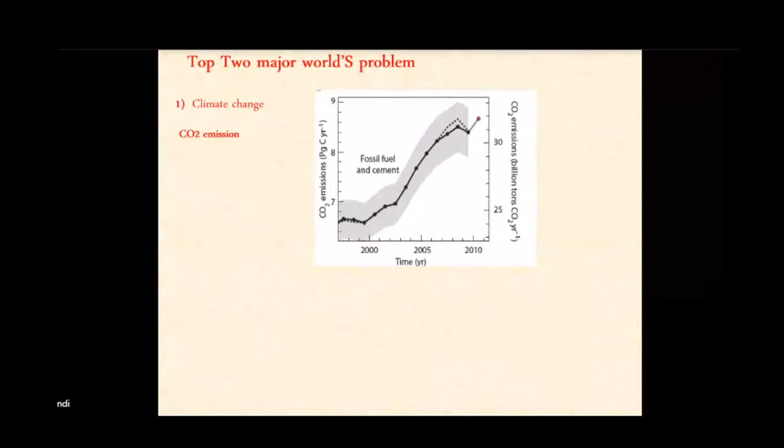Now, there are two top major problems in the world: climate change and CO2 emission. CO2 emission is the major concern. You can see the graph going very steep between 2000 to 2010. Now it has slightly steadied, but it is still increasing.

The effects will be global warming, and also sea level rising. These are the issues with CO2 emissions, because if CO2 emissions increase, it will cause ozone layer depletion. Those are the issues with CO2 emissions, and we will study any of that in detail.

Other than that is the major energy concern. Majority of the power plants work on coal-based power plants, and also coal is a finite source of energy. It is going to be over.

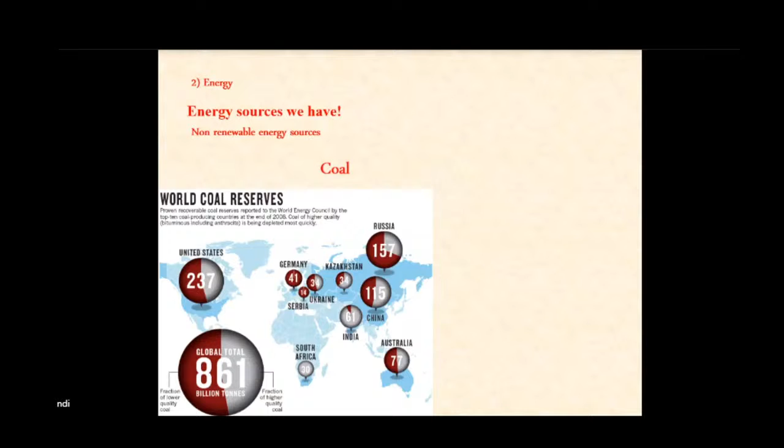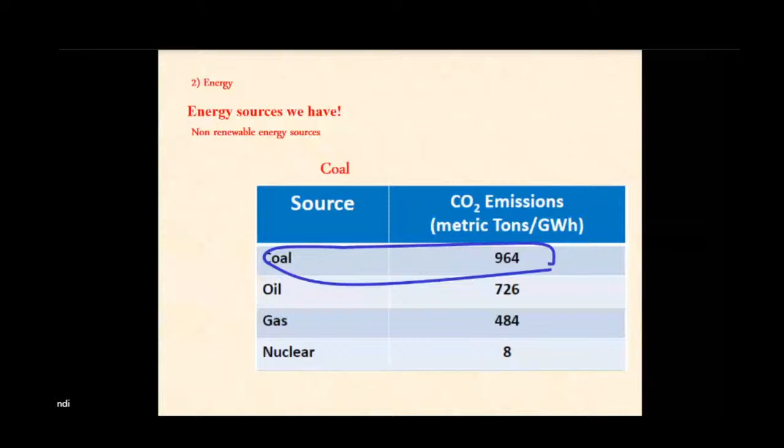Anyhow, we will see this in detail with Indian figures. A major concern is that by around 2035, it will go up to around 28 trillion kWh, which is the estimation of electricity generation. Still in that, you can see coal plays a major role.

But one more thing is that renewable energy is also taking over, because of the present government's initiation. We will discuss any of that in the next slides. Okay, this is regarding carbon emission.

The major difference is because their per capita energy consumption is very high. US is almost around 12,000 kWh per person per year, whereas in India it is hardly 1,020 kWh per person per year. That's why we have lower carbon emission per capita energy, much lower than the world average.

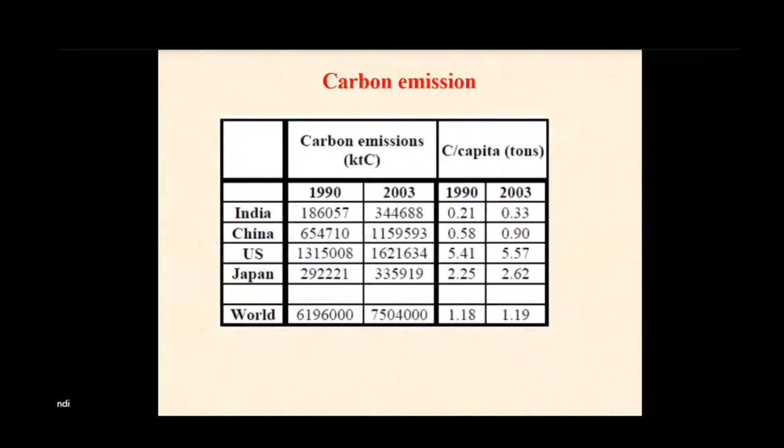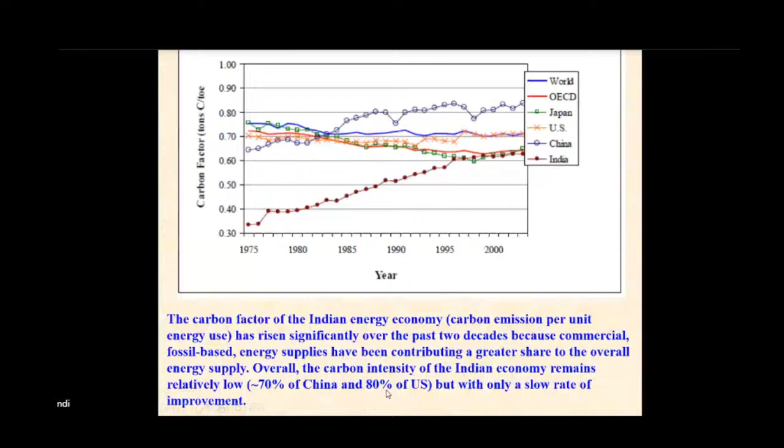This is the energy consumption, around 2010 figure, almost around 21,000 TWh per year. But up to now, we have crossed around 30,000 terawatt hours per year in energy generation, and CO2 emission accordingly is around 28,000 million tons. This is the world average.

Also, the major concern of CO2 emission is through power generation. Emission generation from coal is almost around 12,000 as of 2010.

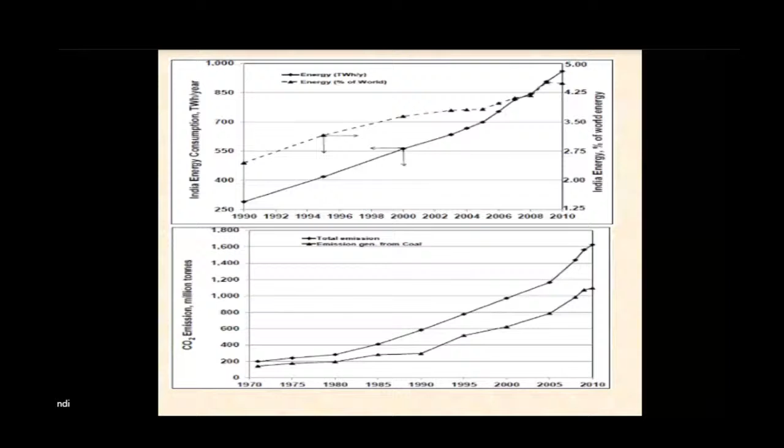Now, as far as peak demand is concerned, it is increasing, almost around 177 gigawatts. The deficit between supply and demand is coming down because of the government's initiation to set up many ultra-supercritical mega power plants.

Almost around 5 mega power projects have come, consisting of around 800 megawatts into 5, that is 4,000 megawatts in a single station. Like that, there's initiation by the government of India, and also a lot of private generating companies, and renewable energy systems.

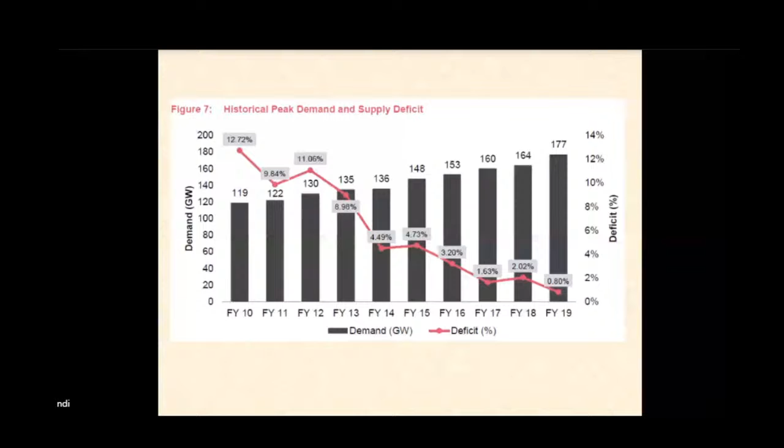Our peak demand and supply gap has reduced, almost around 0.8, which is not a major concern. Similarly, regarding energy supply, the deficit between demand and supply has come down to almost 0.6. Many power plants are being forced to take outage due to non-availability of demand. Now this is the scenario.

This is the installed capacity in India, as per August 31st. But as of now, it has increased to around 374 gigawatts. Another 2000 megawatts have been added in the last 3-4 months.

Now, why I am showing this is you can see coal and lignite based power plants are almost 55.3%, gas is 6.7%. Oil has come down because oil-based power plants have been converted into natural gas. One example is Tata Power, where a 500 megawatt oil-based power plant is fully converted into natural gas. Hydro is around 12.3%, and nuclear is slow phase, around 1.8%.

Renewable is the major one now, almost around 89 gigawatts of power is being generated. That's our Prime Minister's aim also, that by 2022 it will be around 175 gigawatts, our plan to set up renewable energy. After around 2030 or 35, our renewable energy is going to cross over thermal power plants. Anyhow, that planning report is there, we will discuss that.

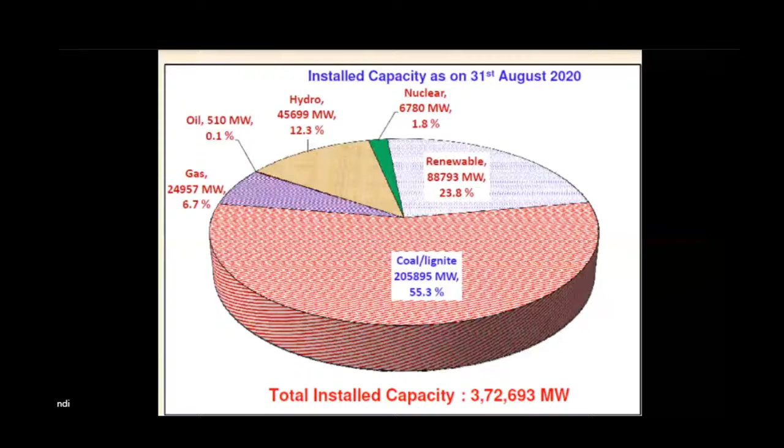Regarding generation addition capacity, you can see here thermal is still the major addition, but after 2014 onwards, a lot of renewable energy power plants have come. That's the change you can see at the bottom, the green has increased. This is mainly because of the government's initiative to go for renewable energy.

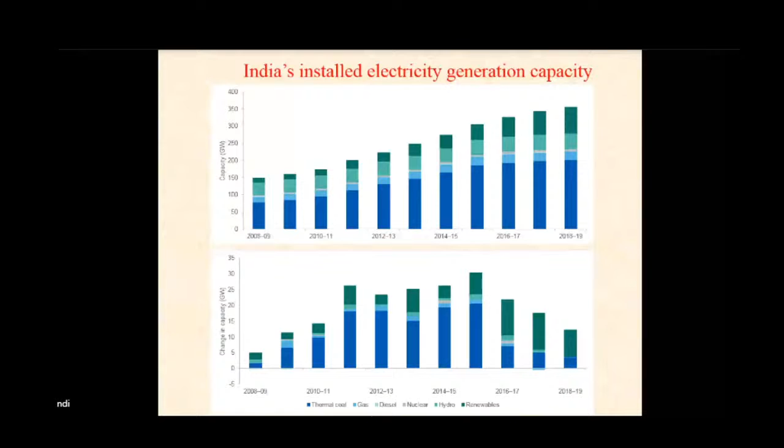Our Honorable Prime Minister and the France Prime Minister started the ISA, that is International Solar Alliance. In that, 121 countries have come, initiated by our Prime Minister. These two countries are going to train them and give technical support for setting up solar PV power plants. Under that, we are going to start an MTech program also in REVA University, to train engineers from overseas, from those 121 countries.

As of June 19, coal generation is around 201 gigawatts, renewable is 79, plus hydro. Now by 21-22, as our Prime Minister mentioned in one of the conferences, by 2022 our renewable energy will go up to 175 gigawatts. You can see by 26-27 itself, our plan is to go for renewable energy more than coal-based power plants, that is 275 gigawatts, to reduce emissions. This will help in controlling our environmental issues.

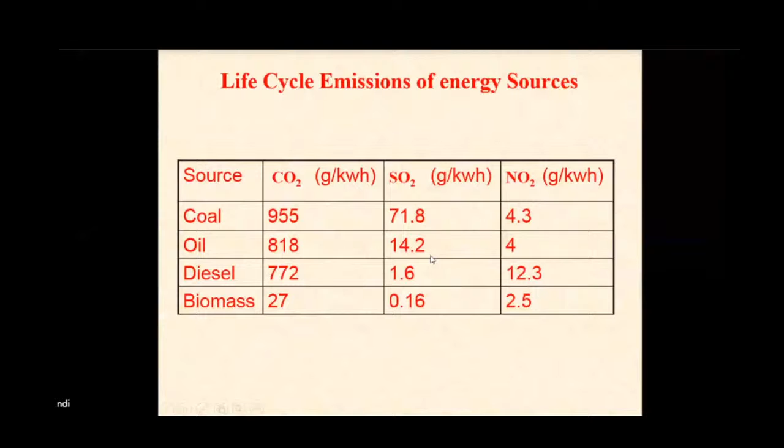The major concern here, emissions with respect to the India average, is 0.955 kg per kWh for CO2. SO2 is slightly on the higher side, but still less for Indian coal, and NO2 as well. This is based on data available from the internet and literature survey.

I have calculated the major concern about CO2, because a person releases CO2 at around 42 grams per hour, which comes to around 1 kg per day. To compensate that, trees absorb CO2 and release oxygen. Considering around 125 crore population, 18 trees per person are required to compensate for that CO2 emission. So to compensate our population, at least 23,400 million trees are required.

This is for the general ecological balance. Earlier, whatever CO2 human beings used to exhale was absorbed by trees, and they used to give out oxygen that was taken by human beings. That's how the ecological cycle was balanced.

Because of industrialization, technology upgradation, and the addition of transportation sectors, electric vehicles, and power plants, CO2 emissions have increased. Comparing with thermal power plants, the Indian average CO2 emission, considering all power stations from 60 megawatt up to 800 megawatt plants, is around 1.05 kg per kWh. Considering around 219 gigawatts of coal power, almost 2.3 lakh tons of CO2 is liberated into the atmosphere. To compensate that, almost 100 million trees are required. If sufficient trees are not available to extract that CO2, this CO2 will...

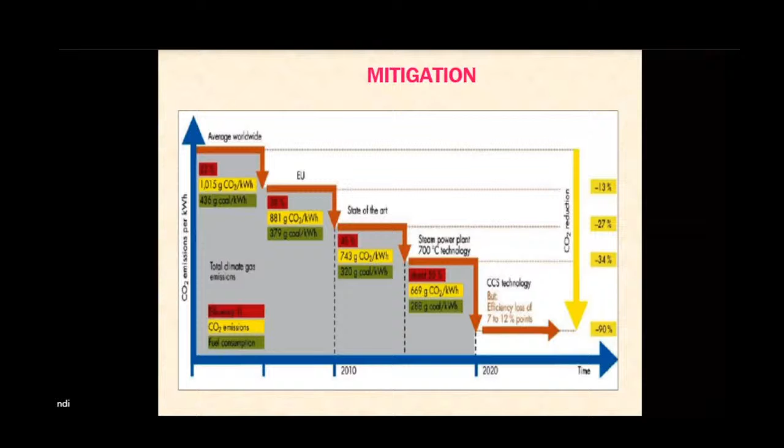One more slide, I think it is missing. Anyhow, as we go up the technologies, even comparing with older power plants like 120 megawatt and 140 megawatt, their specific CO2 generation is around 1.4. We have measured 1.4 tons per megawatt like that. Now this is regarding the power plant.

These are the components in the power plants. The major components will be the boiler. In that boiler, we have the water wall, then the economizer, then the superheater, then the reheater. In this boiler, the feed water comes from the HP heaters and goes to the economizer. After the economizer, it goes to the boiler drum, and from the boiler drum it comes to the water wall, sometimes called the evaporator. In that water wall, latent heat extraction from the combustion chamber takes place.

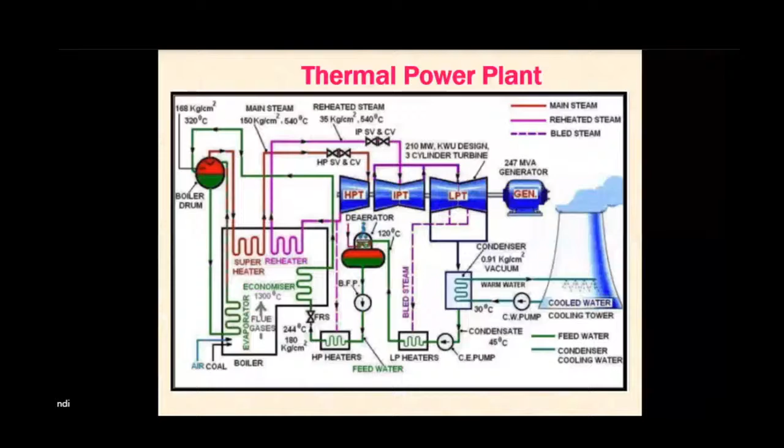Now, these are the major equipments: boilers, turbines, auxiliary power equipments. In that auxiliary power equipment, ST auxiliaries, that's what I was telling: boiler feed pump, condensate extraction pump, induced draft fan, forced draft fans, primary air fans, mills. And the outlying auxiliaries like CWP, that is circulating water pump, crushers, air compressors. Any of these things we will see later on.

This is the schematic of that. Already I have shown this one. Regarding this one, you can see this is the chamber, that is the furnace. These are the mill outlets. It comes here, and then coal is burnt here.

Then it comes to the air preheaters, APH. Then it comes to the ESPs. After that, the ID fan, then it goes to the chimney. This is regarding the flue gas circuit.

To combust that, air has to be supplied. In air, there are two types: primary air and secondary air. Both the airs will be heated in the air preheater. Secondary air is supplied by the forced draft fans, that will go to the chamber here, where a wind box will be there. It will provide the atomizing air, you can say that.

Then one more air, that is primary air. Primary air is supplied by the PA fans, that will go to the mills. In mills, hot air will mix with the coal, and the main aim of the primary air is to lift the coal from the mill to the burner. That's what, the coal air mixture temperature and flow is also very very important in combustion.

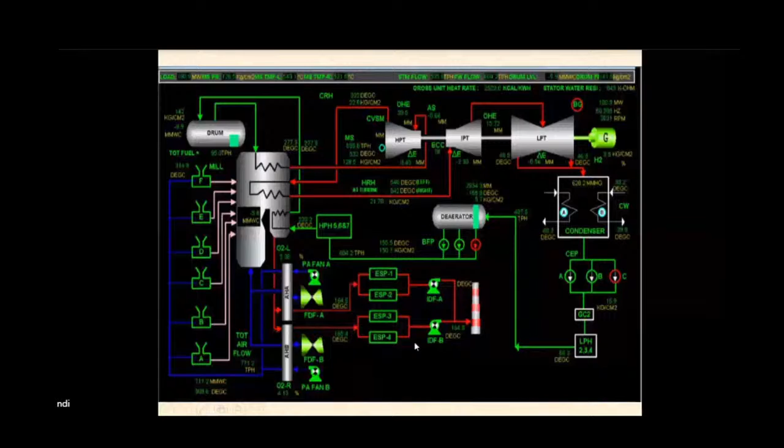This is regarding the condensate and feed water circuit. Already I have discussed this. You see, condenser, it comes to the deaerator, and then after deaerator, it comes to the boiler feed pump. Then it comes to the HP heaters. This is a reheat cycle. Then it comes to the regenerative feed heating cycle. Then it comes to the economizer and then drum.

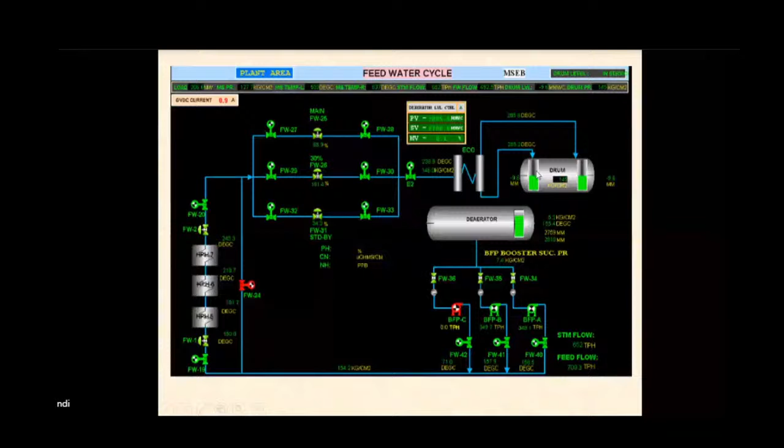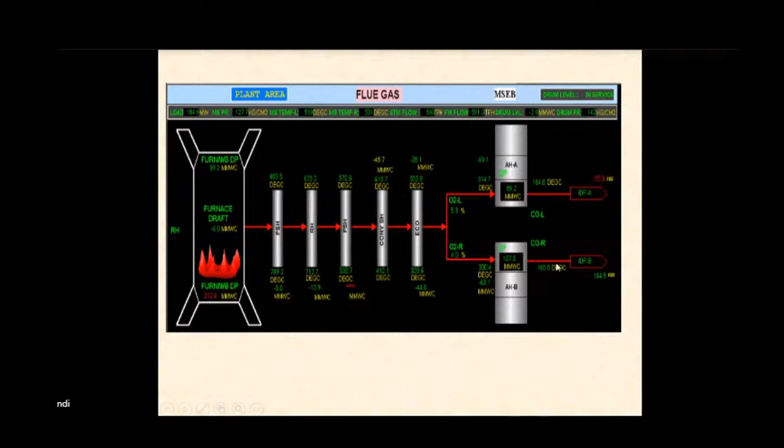We will see here how the flue gas will flow. Actually, this is the furnace - I was telling minus 6 is there, these are the live figures we have captured. Then this is the primary superheater, the reheater, and the platen superheaters. This is a final superheater, reheater, and platen superheaters. Then convective superheaters, economizer, then comes the air preheater, goes to the ESP, and after that it goes to the ID fan.

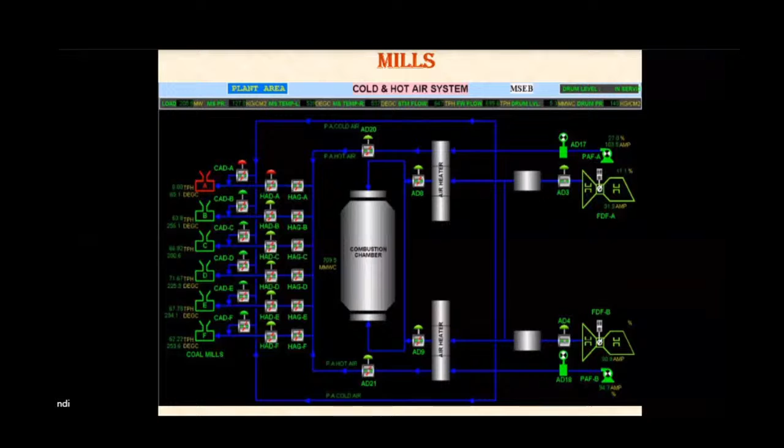These are regarding the same thing for any of this. I will skip that.

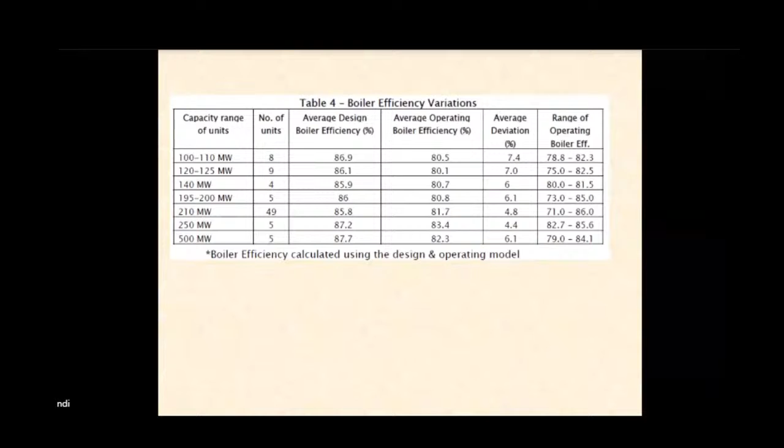These deviations are the major concern for increasing environmental pollution. These are again different cases - it also depends on the aging of the plant, because as the age increases, your efficiency comes down.

That's why in thermal power plants, they generally take two types of overhaul - one is the annual overhaul, and the other is the capital overhaul. Capital overhaul is taken once in 5 years, but annual overhaul is taken once a year. For the annual overhaul, they take about 20 to 28 days. Earlier they used to take more than a month, but nowadays they have optimized it - they identify the prone parts, rectify and then replace them.

But because of non-availability of schedule, many times these overhauls are taken during the rainy season - monsoon - because during monsoon all the hydropower plants will be at peak. But many times, even during that period, if sufficient power is not available, they were not given clearance for doing the overhaul. So they kept operating for an extended period. If it operates for an extended period, the performance becomes very poor, which causes poor performance and environmental issues.

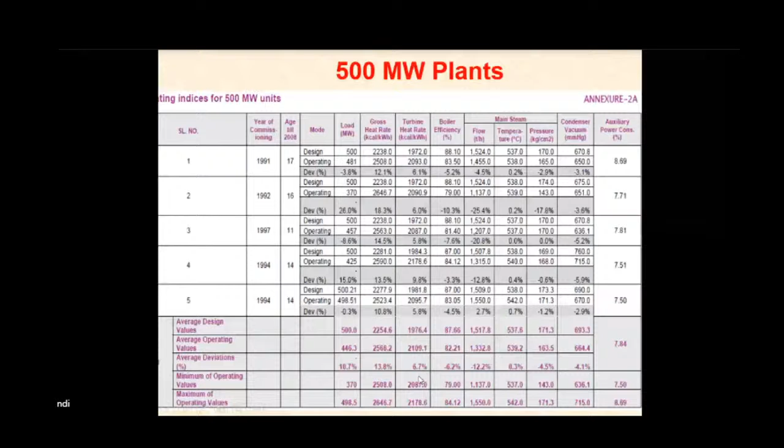The auxiliary power is more because this is a stabilization period, like a bathtub curve. Initially, in the first 1 or 2 years, all the parameters will be deviating more. Once it comes to stabilization, then it will steadily go down.

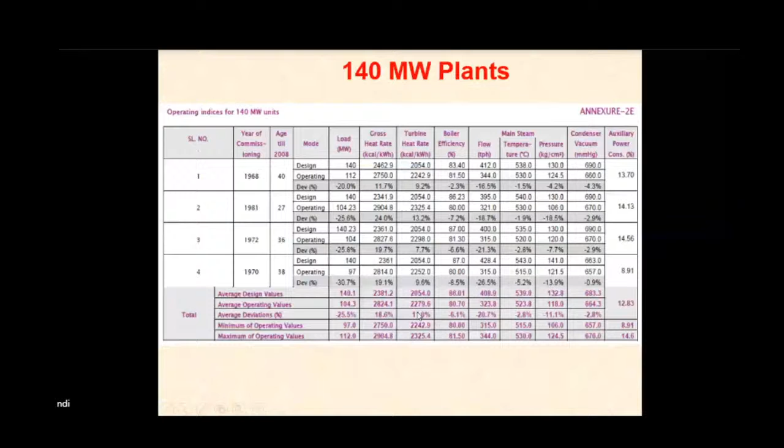This is for 140 megawatt. You can see here the average deviation rates are very high, in this case 18.6, because many of these power plants, even 100, 110 megawatt plants, also have more deviation. Many of the older power plants were of refractory type, tube and refractory type furnace. Nowadays they have gone for membrane type water walls, and wherever membrane type water walls are used, the performance is better than refractory and tube type furnace.

This is just I thought of giving this one. What are all the reasons for higher heat rate?

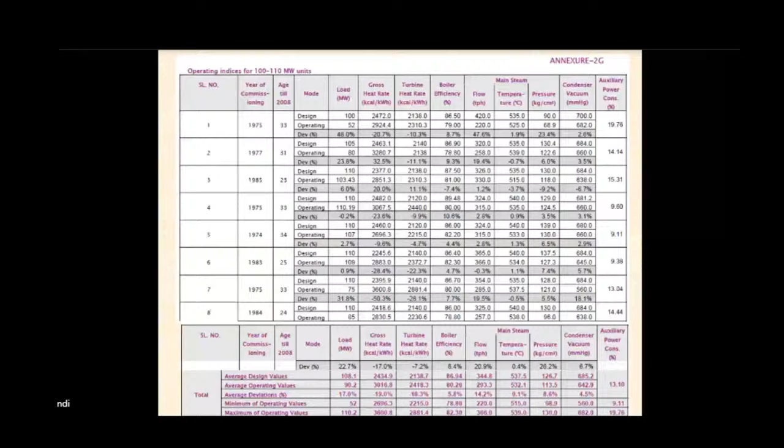The first one is low combustion efficiency leading to high carbon loss. That's the efficiency we have seen, the boiler efficiency was less. If it is less, to produce the same steam output you are burning more coal, which means you are adding more ash, more temperature in the flue gas and more CO2 emission. If your combustion efficiency is improved, then automatically you can reduce all these environmental issues.

Then higher forced outages, especially in these older units, because as the life goes, the water wall gets affected due to ash content. Higher ash content means the erosion rate is more, especially in boiler tubes, in superheaters or the economizer zone, where the ash erosion rate is higher for the boilers.

Also, many times what happens is our boilers are corner fired and a fireball has to be created in the center. We fire from all four corners to make the fireball form at the center. Many times, if there is a mismatch in the burner operation, problems occur.

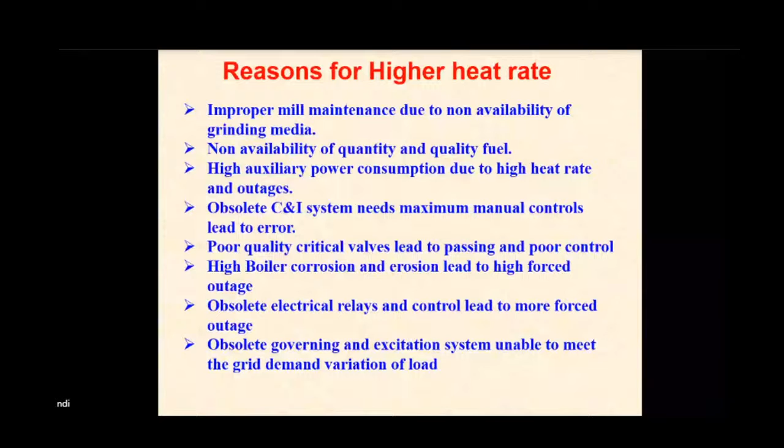We'll now discuss the major concern of environmental issues, mainly due to coal quality. If the coal quality is better, performance will be better and environmental issues will be less, because nowadays our Indian coal quality has gone down.

Our boilers are designed for a calorific value of around 4,000 kilocalories, but the presently available coal quality is around 2,600 to 3,000 kilocalories per kg. Because of that, there's a burden on the power plant.

We carried out a study at the Raichur thermal power plant during 98 or 2000. Because of the coal, they were unable to load the plant to 210 megawatts; they could only operate up to 180 megawatts, due to high ash content coal and lower calorific value.

That's what led them to import coal. In other countries, better coal is available, such as Indonesian coal, with different calorific values, and South African coal. Then there's Australian coal, and Chinese coal, which is also better.

The ash content in these is very low, whereas in Indian coal, we've measured ash content up to 55 to 60%. As ash content increases, the burden on the ESP increases, and the burden on the ID fan increases, automatically reducing performance and adding to environmental issues.

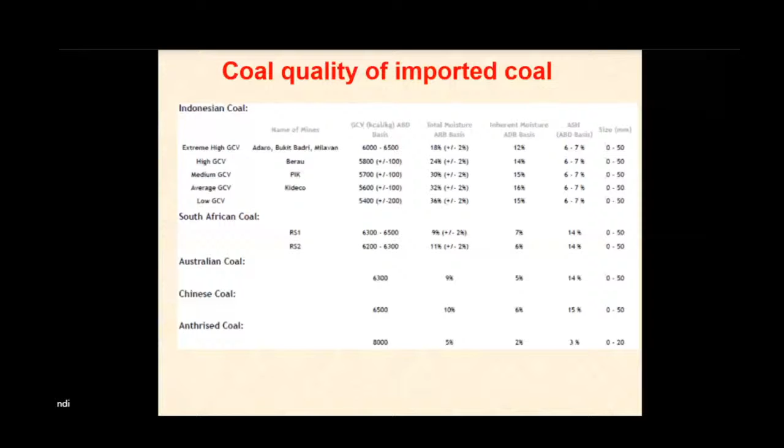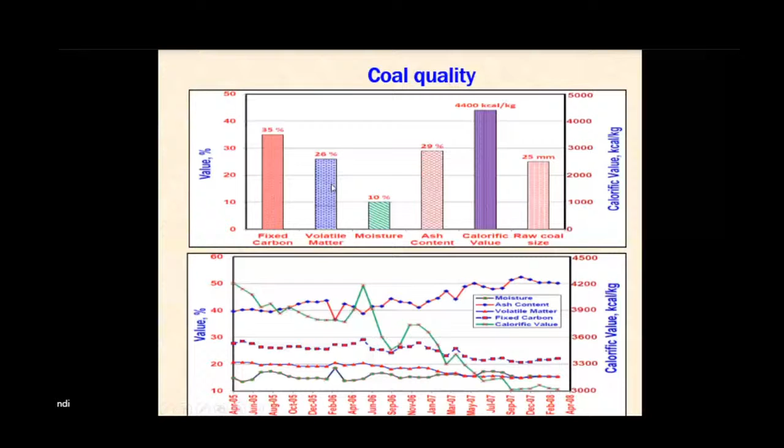These are generally the designed values. In one power plant we studied up to 2008, you can see over the period of time ash content has increased, while calorific value, shown by the green line, has come down. These are the designed values shown here.

Again, as I mentioned, as the calorific value of coal increases, heat rate comes down, meaning performance improves. Over the period of time, heat rate has increased as calorific value has come down.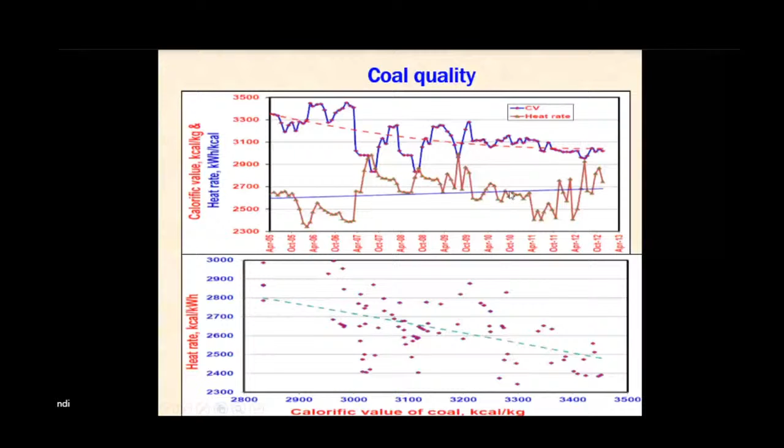If your calorific value of the coal increases, your specific fuel consumption - that is, to generate 1 kWh your fuel requirement will be less. And at the same time, your auxiliary power also comes down if your calorific value of the coal is better.

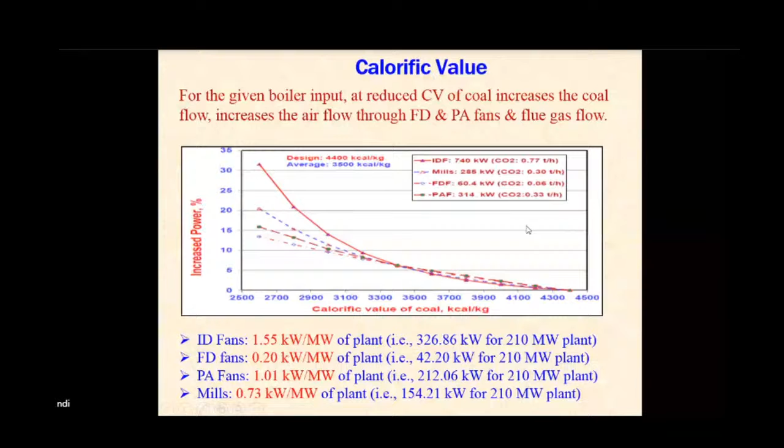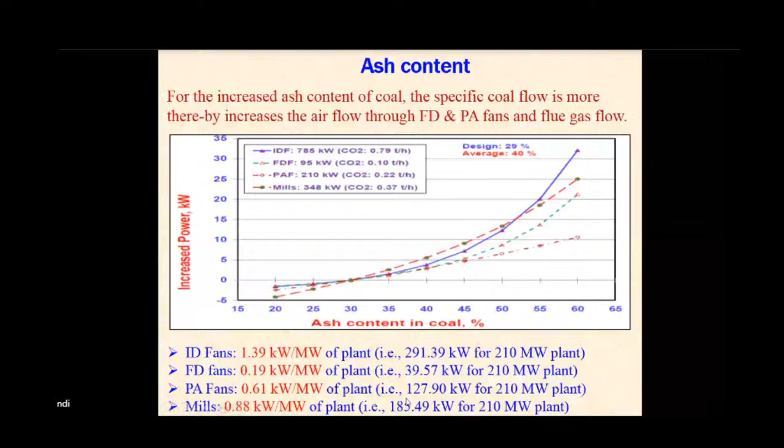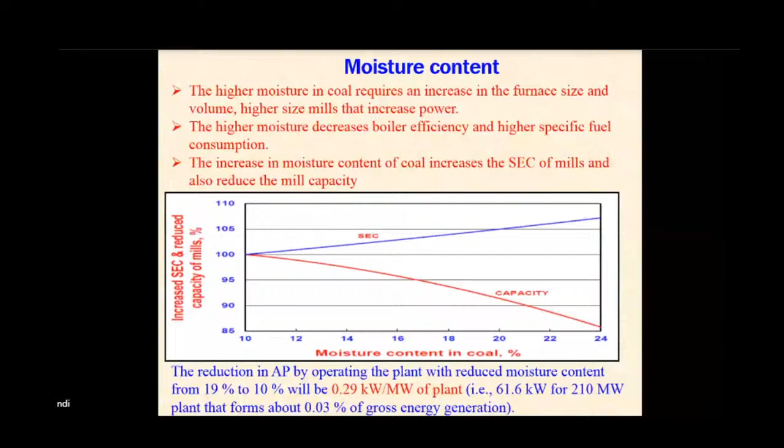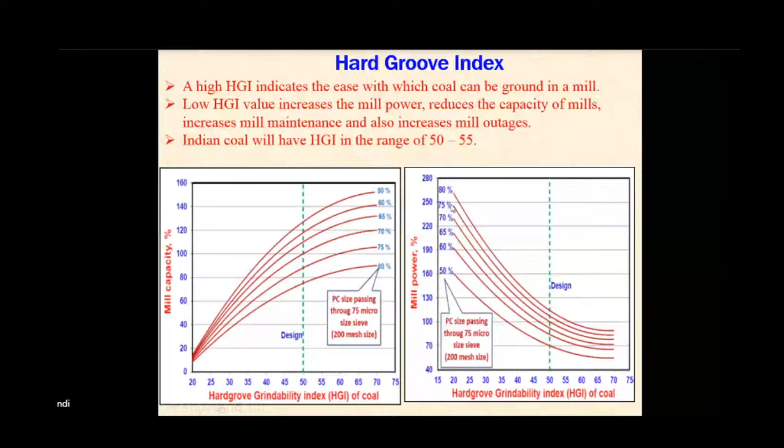Then Hardgrove index - this is also a very important parameter. Generally our boilers are designed with HGI 50 to 55, that's what Indian coal Hardgrove index is. But some imported coal has a lower Hardgrove index, and if the Hardgrove index is less, your grinding power requirement is high - the mill power requirement will be high as the Hardgrove index gets lower.

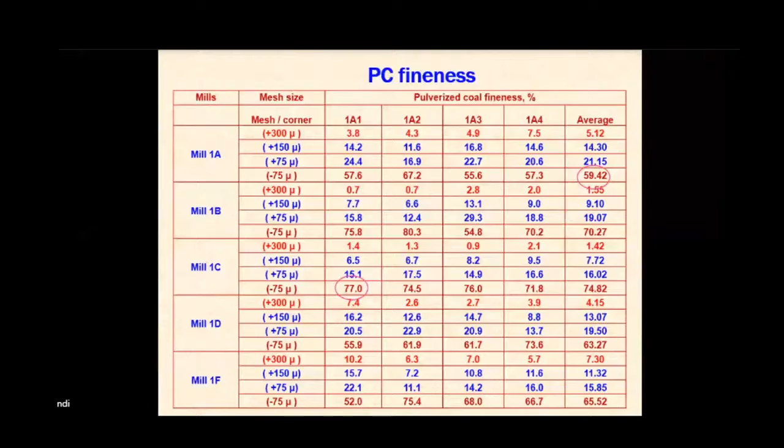Regarding particle size, as the percentage passing below 75 microns increases, your mill power will increase.

Another major problem with these mills is the raw coal. Generally, coal comes from the wagon to the coal handling plant, wagon tippling tips the coal, then it goes through the conveyor to the primary crushers. Some power plants have two stages of crushing, but modernized plants go for a single stage. Primary crushers and secondary crushers are used, and after the secondary crusher it comes to the mill. As per design, the coal size should be around 125 mm at the inlet.

The 125 mm coal has to go to the coal inlet, but the coal output should be less than 25 mm size. The construction of crushers differs - primary crushers generally use hammer type mills. In hammer mills, it hits the bigger coal and specific energy consumption is less, but the sizing performance is less. In the primary crusher, coal is reduced to around 125 to 50 or maybe 75 mm, then it goes to the secondary crusher, which reduces coal size to below 25 mm.

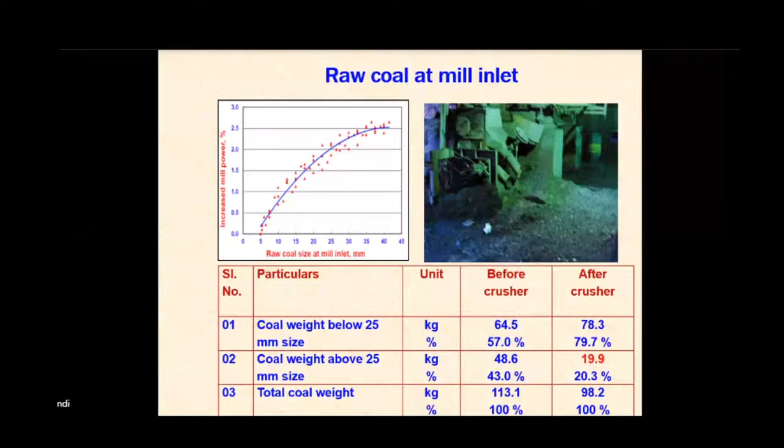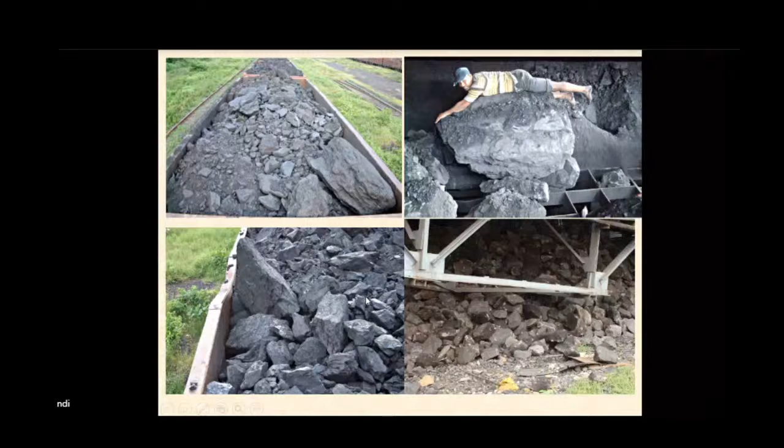Again, I was telling that this is washed coal. What washeries do is wash the coal to reduce the ash content. You can see here the ash content of raw coal versus washed coal - the ash content has reduced. Thereby the performance of the plant increases because your ash reduces, and at the same time your CV increases.

You can see here the range we have actually got from the field, okay, and this is also washed coal. By washing the coal, you can reduce almost 20 to 25% of the coal quantity, and thereby reduce the transportation cost also.

Generally washeries keep the coal near the collieries only, because from there they can reduce the transportation cost by using that washer. Some of the performance benefits I will show - plant efficiency increases.

We have carried out some study here. By using washed coal, you can see the ash content has reduced from 52% to 31%. The CV has increased from 3,000 to 3,550. The auxiliary power, especially of fans and mills, has come down - about 0.43% of the total auxiliary power is reduced, and CO2 emission is reduced by about 0.94 by using the beneficiated, that is washed, coal.

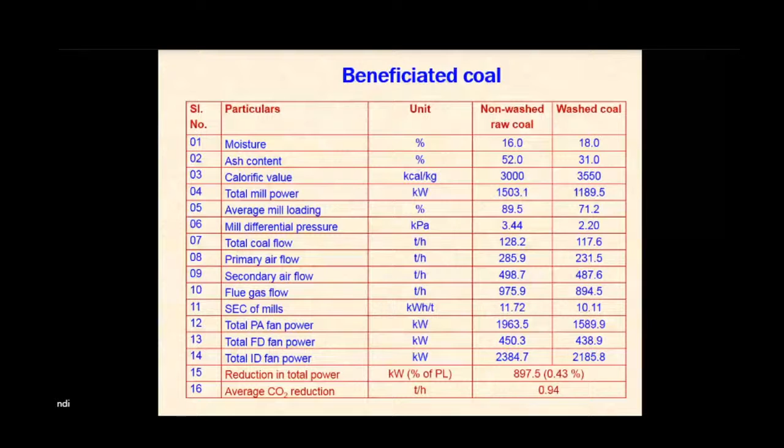This is another case, Satpura Thermal Power Station, that is NTPC. They have presented this in one of their papers. PLF increased from 73% to 96% because if the coal quality improves, your plant loading capacity increases. Coal consumption reduced because your specific coal consumption comes down, as you are removing the ash.

Without washing, if you burn the coal, you unnecessarily add all the ash into the boiler, because ash causes erosion. By washing, you can reduce the erosion rate, and that's what reduces your auxiliary power. Downtime, especially boiler tube failures and such, will reduce drastically by using washed coal. With no fuel support, boiler efficiency improves by about 3%, and mill power consumption has reduced - they have presented this.

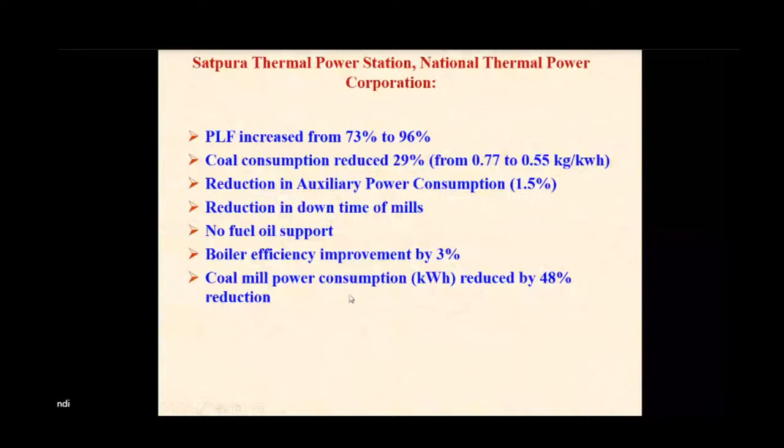You can see here, this Dadri power plant, again an NTPC plant, has 4 into 210 megawatt units - that is megawatt, not milliwatt.

There is also savings in damages during unloading. When the coal rake comes, they give some time to unload it. If you don't unload and hand over the wagons to the railways within that particular time, they will charge a demurrage fee. Because the quantity has come down, they are able to save that demurrage charge, and it's also easier because in washed coal, they have a crusher too. With that crusher, the size of the coal has come down drastically at the collieries itself, instead of getting boulders which take time to clear. That time also you can reduce.

That way you can reduce the demurrage charges and increase operating hours of the plant, because your mill outages come down and the erosion rate inside the furnace comes down. This means increase in PLF, increase in utilization factor, reduction in breakdown period by 60%, increase in overall efficiency, increase in generation, reduction in support fuel oil, specific fuel consumption comes down, increase in total units sent out, reduction in CO2 emission, and reduced transportation.

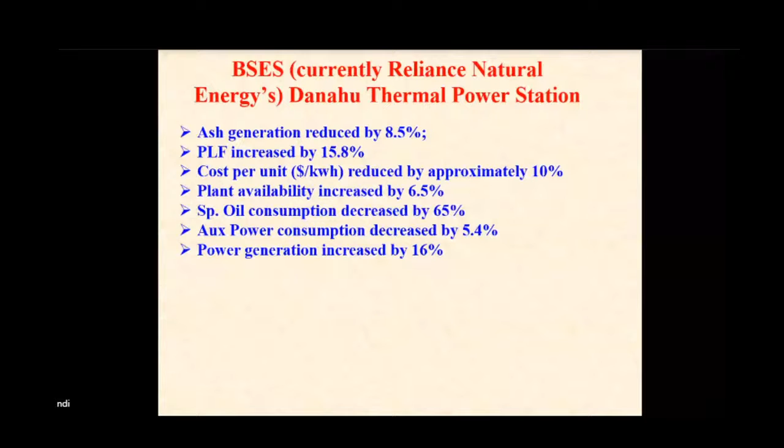This is regarding the beneficiated coal, that is the washed coal. Now, coal blending, as I was telling, imported coal, the calorific value is almost more than 5,000 or 6,000. Even sometimes earlier, initially we have seen Australian coal up to even 8,000 kilocalorie per kg.

But the problem with this imported coal is that because of the higher calorific value, we cannot burn it directly in our furnace. Why? Because our boilers are designed at 4,000 kilocalorie per kg initially, then later on some boilers were designed with 3,700 kilocalories. Only for that particular coal, if you burn it, it can perform.

If you go for higher calorific value coal, like 6,000 or 5,500 or maybe 8,000 kilocalorie, what happens? Your burning will increase, your latent heat extraction has to be increased, and the size of the water wall has to be increased.

Because your latent heat extraction comes down, your superheat, that is the convection superheaters, there the heat extraction has to increase. What happens? Your superheater temperature shoots up because the heat content in the furnace cannot be taken away by your water wall due to the constraint. If you burn high calorific value coal, that's what happens - it goes to the superheater zone or maybe reheater zone.

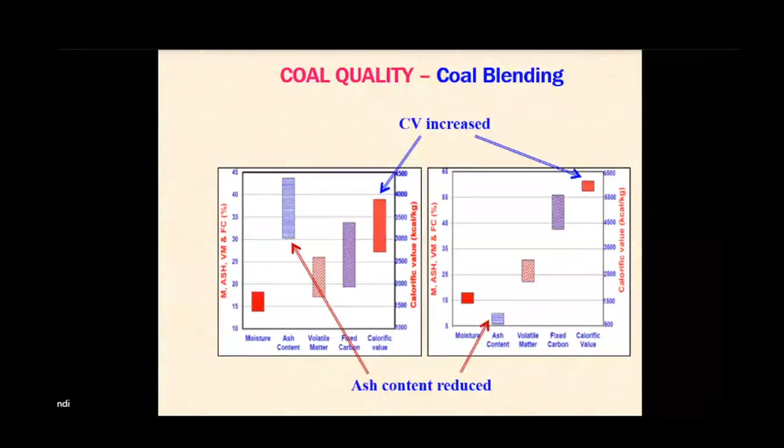That's what they do instead: tier blending. Tier blending in the sense, there are 6 tiers in a corner-fired boiler, that is A, B, C, D, E, F. In that, one mill goes for imported coal, and the remaining 4 mills go for Indian coal. Thereby they can increase the efficiency.

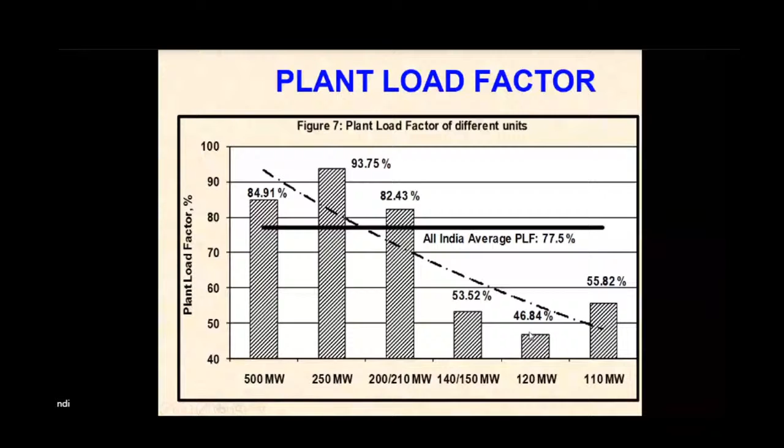Then again, plant load factor is a major concern. Your performance depends on the plant load factor. Different megawatt plants have load factors varying from 93 to, even for this 120 megawatt plant, their power plant load factor is low. That caused the poor performance.

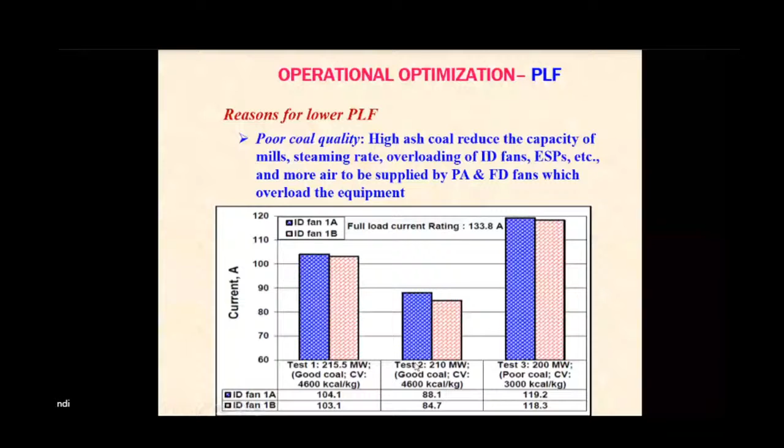Again, we have carried out some study in the Danahu power plant, that is Reliance, using different coal. You can see here poor coal versus good coal with a CV of 4,600. There they were using Indonesian coal and Indian coal also. With good coal, you can see here the ID fan current is less, but whereas with poor coal, the ID fan current has gone up much more.

Here you can see here the plant capacity also we have seen. The margin is very, very less in case of the poor coal. Your efficiency will be less, and your auxiliary power consumption will be very high in case of poor coal.

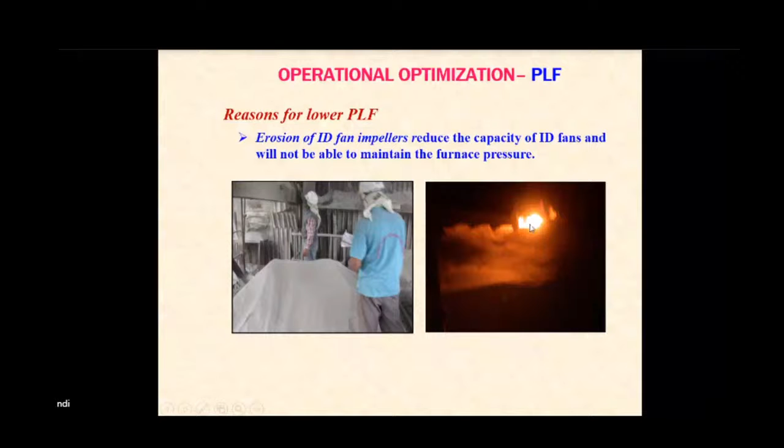This you can see here, some of the ID fan impeller erosions, and this is one of the... air ingress. Air ingress also causes the loading of the ID fans. You see one of the power plants, you can see this ash puffing. Actually this furnace is working with positive pressure. You can see here manholes, these are all causes for the air ingress.

You can see here, just I will skip some of the things.

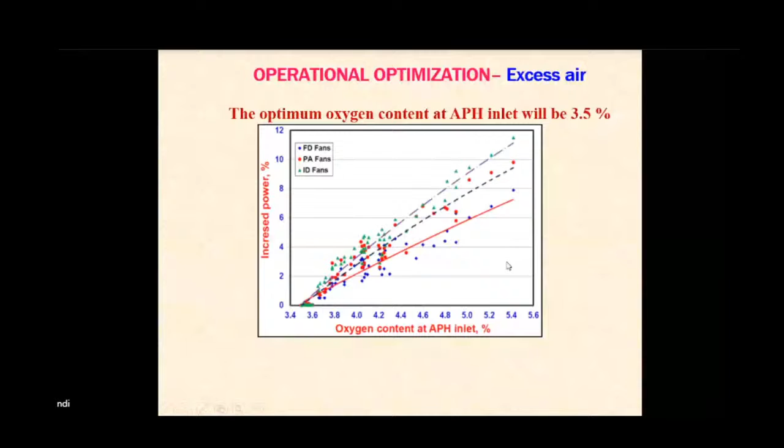Here you can see these are the openings, air leakages in the ducts. If there is air leakage in the duct, what happens? The additional air will not take any part in the combustion, so unnecessarily your excess air will increase. If the excess air increases, your dry flue gas losses will increase, and at the same time your exit flue gas temperature increases.

That causes environmental issues, and your ID fan loading will increase. These are the manholes they have provided, but they have not closed it, they have kept it open. Also, insulation on the boiler drum, you see that is not there, and you see these are the leakages. You can see a lot of ash and ash puffing, we will call it, and this is the blow down.

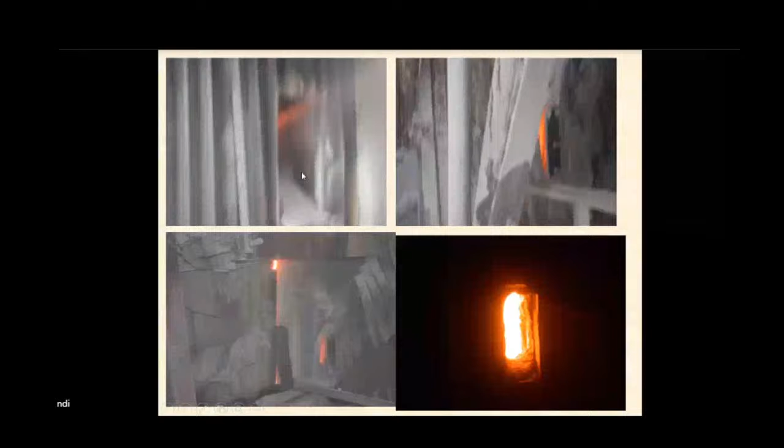Again, you see this is a positive pressure. You see this, it's coming out, the flame is coming out. It is very dangerous to go around this one. That's what the temperature surrounding the boiler will be more because of this puffing.

And that's what I was telling, you see the furnace pressure at the furnace will be on the negative side. This all will be negative. Only at the ID fan outlet it will be more.

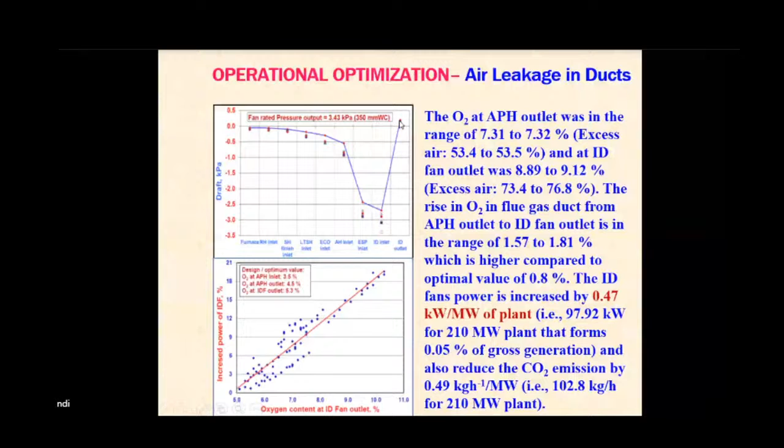Air leakage, and flue gas pressure drop in the APH, that also causes this - more auxiliary power for the ID fans. That also reduces the capacity. That's what you can see here.

There are so many blockages. Here also you can see cementing has happened, so there is no passing of the flue gas. That's what they have to do - once overall, they have to clean up or replace the baskets.

This is one of this one - again for proper combustion, your excess air should be maintained around 17 to 20%. Why excess air? Because our main aim is to convert total carbon into carbon dioxide. If you give only theoretical air, you may not be able to convert full carbon into carbon dioxide.

What happens if you don't provide that properly? Then your unburned, that is CO formation, will be more, and CO at your boiler outlet will increase. If the CO is more, it is hazardous for human beings as per CPCB norms.

CPCB norms say it should be less than 100 ppm, and at the same time the ash particle - that is the particulate matter at the exit of the chimney - should be around 150, but now they have revised it to 100 microgram per meter cube. At the atmosphere, at any point, if you measure the particulate matter 10, the value should be less than 100 microgram per meter cube.

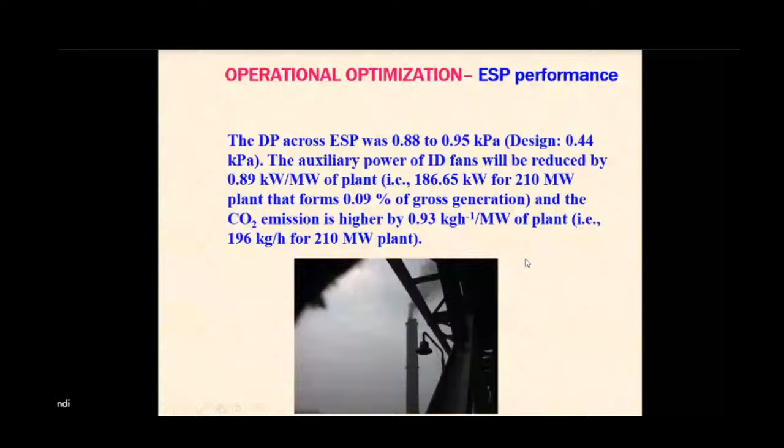This is one of the power plants we have seen. You see the dust concentration at ESP is actually around 1060 to 9319 milligram per meter cube is measured. As per the design value, it should be around 100 milligram per Nm cube, but during the test also you can see here 1600.

What happened? This is mainly because of the non-operation of the ESPs. ESPs are designed for 60 kV DC voltage, and it was varying between 17 to 40 because of some problems, and current also was varying between 40 to 200. Means it is not able to load, so the collection of the plates is very poor.

That's what makes your dust concentration at the ID inlet very high. Because of this high dust concentration at the ID fan, every 6 months they have to change the ID fan impeller. Otherwise, ID will not create the sufficient negative pressure, because the main aim of the ID fan is to create the negative pressure in the furnace.

If it is not able to create that negative pressure, generally in the power plant, if the pressure goes to around 10 mm of water column, it will give an alarm, and if it goes to 15 mm of water column, it will shut down this furnace. That is the condition. To maintain that, sufficient suction has to be created by your ID.

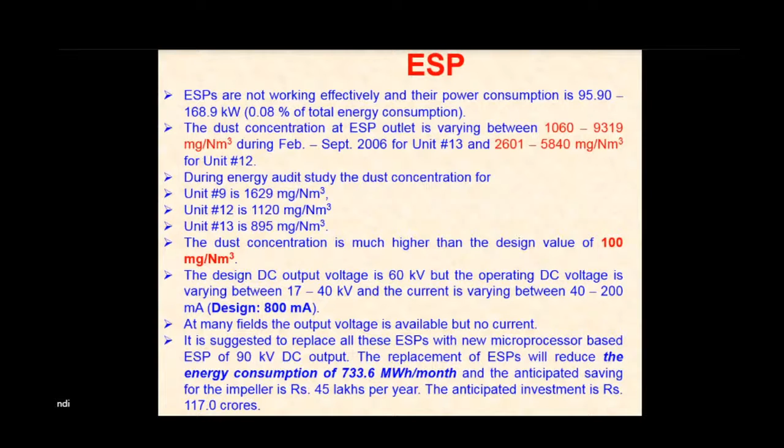This is another one, one of the power plants we have seen in MSEB, that is Parli, or maybe some other one. There we have seen they were using ammonia injection into the flue gas. By injecting the ammonia in the flue gas, the resistivity of your dust, that is the ash, will come down. If the resistivity is less, your collection efficiency of your ESP increases.

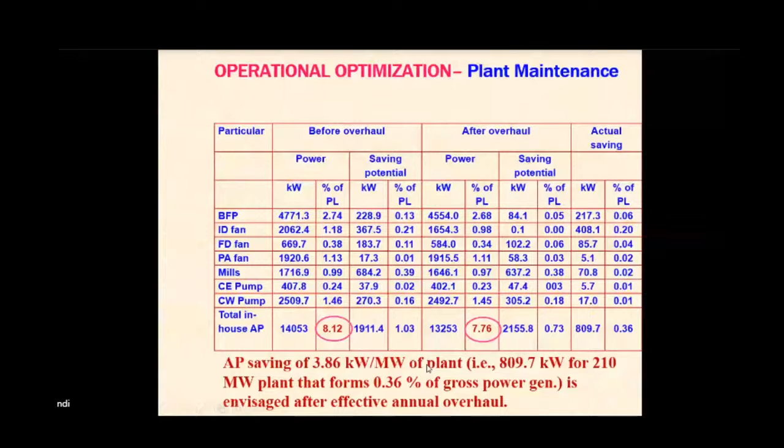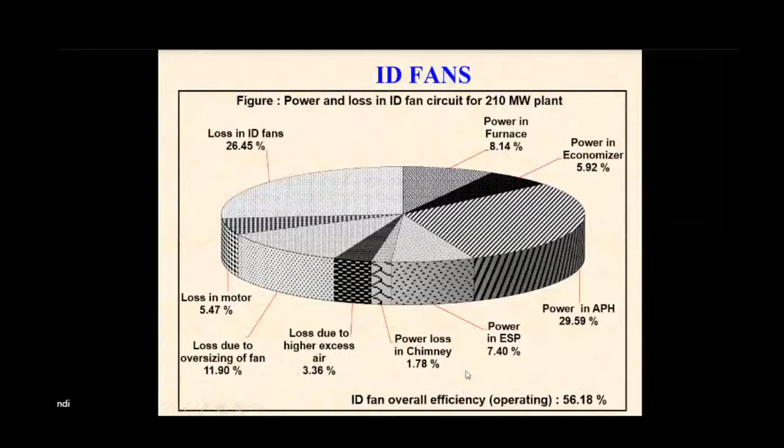Boiler efficiency, yeah, this. Some of the ID fan performance what we have measured, 56.18%. In that, what are all the components in that? That's what I was telling.

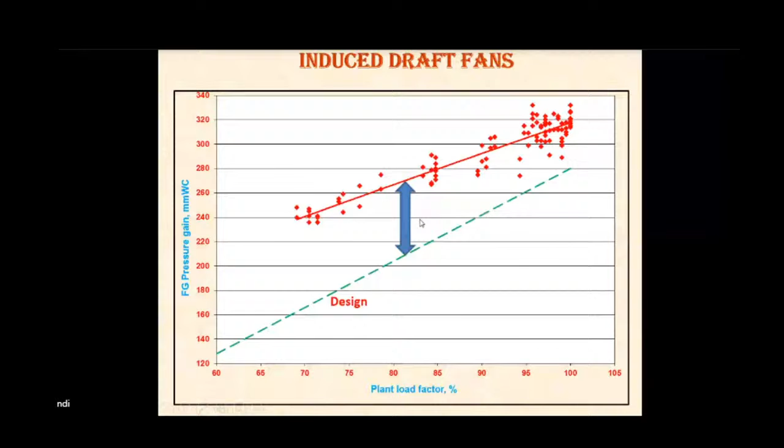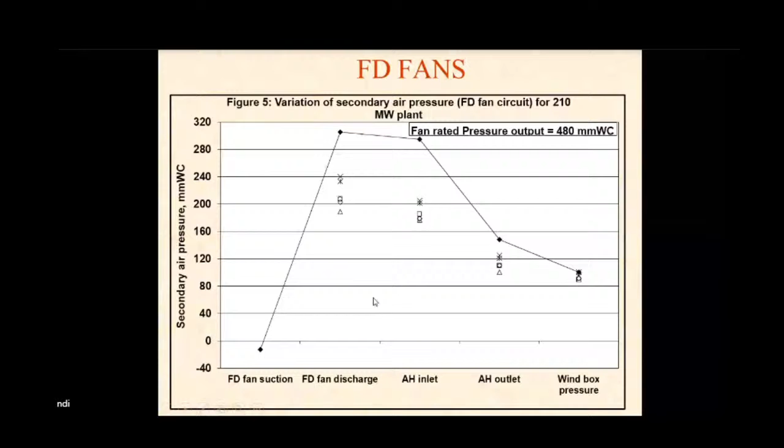And then again this is the power consumption. This is the FD fan, that is the secondary air fans. In that again the pressure, this deviation. This is the power, auxiliary power.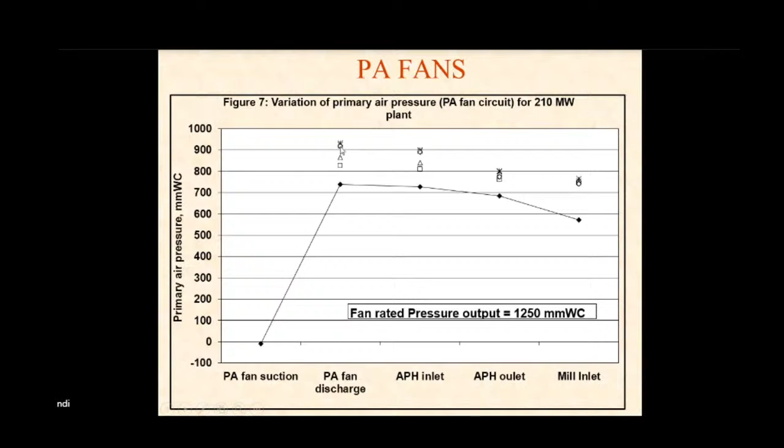These are the PA fans. PA fans generally design pressure will be around 1200, 1250, but operating will be on the lower side, mainly because of the leakages and other things.

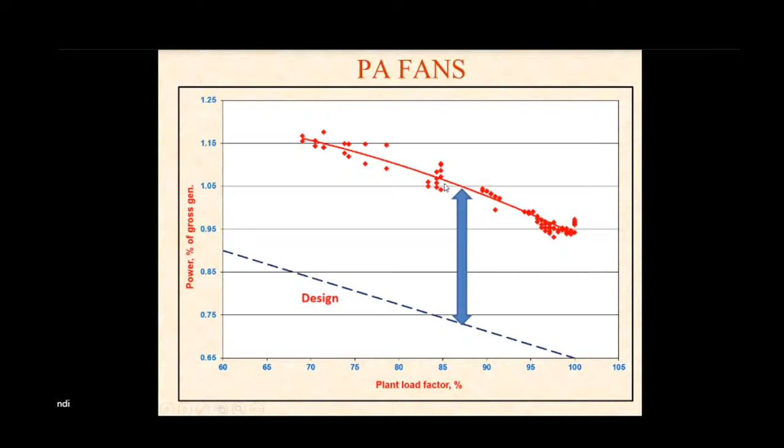This is again the power consumption. You can see this is the gap between the design value and the operating value. These all add on to your environmental issues. And again, condenser vacuum.

I was telling about the condenser vacuum. That is because of these condenser tubes. You can see a lot of tubes are blocked. Because of that blocking of the tubes, so many tubes are blocked, that caused your condenser vacuum to be less. If the condenser vacuum is less, your steam extraction will come down, and your plant efficiency comes down.

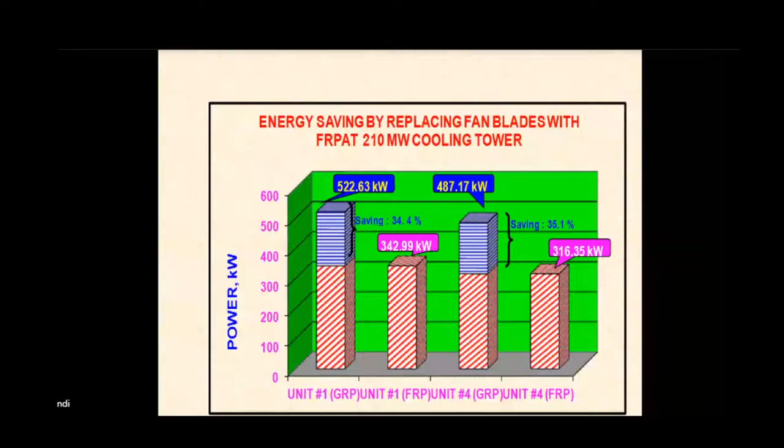And then again, cooling tower. We have carried out some study in an NTPC power plant, replacing the FRP fan, GRP fan they were using, by replacing with the FRP fan. With this, you can save the auxiliary power.

With this, I come to the conclusion that operating the plant at higher PLF will reduce CO2 emission, use of coal blending will reduce the emission. Operating the plant near to MCR condition, that is the maximum continuous rating, your auxiliary power will come down, and your environmental issues come down. Operating at the optimum excess air.

Excess air generally we maintain around 20%. If it is more than that, if the excess air is higher, your dry flue gas losses will be more, and your auxiliary power by fans, draft fans, that is ID, FD, PA, it will increase. And furnace ingress, that is a major concern in many of the power plants.

Furnace leakage causes higher auxiliary power of the ID fans and capacity comes down. Again, with maintenance, we can reduce the auxiliary power, and the performance of the plant can improve, thereby we can control the environmental issues.

With this I will come to the end of this session. I think I have continued without a break. If you have any questions or anything, you can ask me.

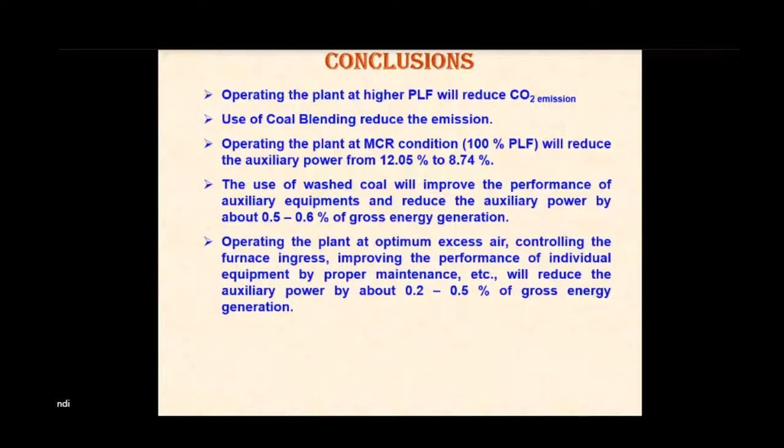That is what we are looking for, especially on the air quality and all. We are looking at dust concentration, SO2, and CO2.

One more advantage of Indian coal is its sulfur content is less, so we don't have much problem regarding the power plants on this. Whereas for the imported coal, especially the quality, we are looking at sulfur and oxygen. For that we go for stack concentration, that is SO2 and CO2.

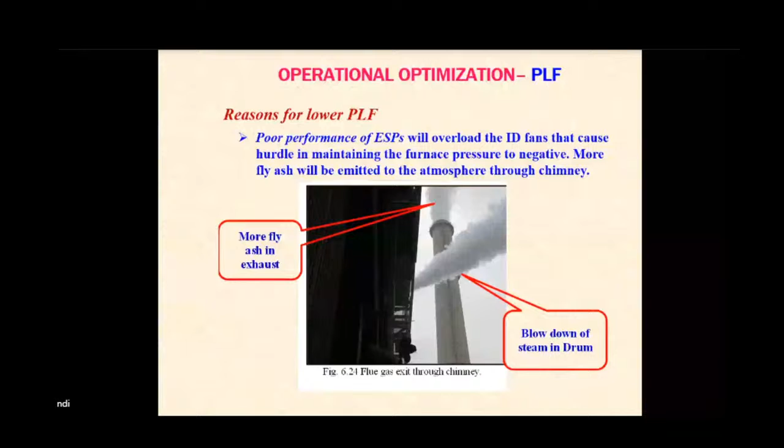The pollution control board has brought out norms, some limit depending on the capacity of the boilers, for a particular power plant, compared to the chimney height, that is for particulate emission. Earlier the particulate emission, that is PM10, used to be around 150 milligram per Nm3, but now they have reduced it to 100, though it has not yet come in as a regulation.

One question from K. Rajashekar, an EEE student: Sir, what will be the scenario in thermal power plants when EVs will be used and demand increases? Is it true that, contrary to belief, EVs will increase pollution rather than decrease it, as more coal-based generation will take place?

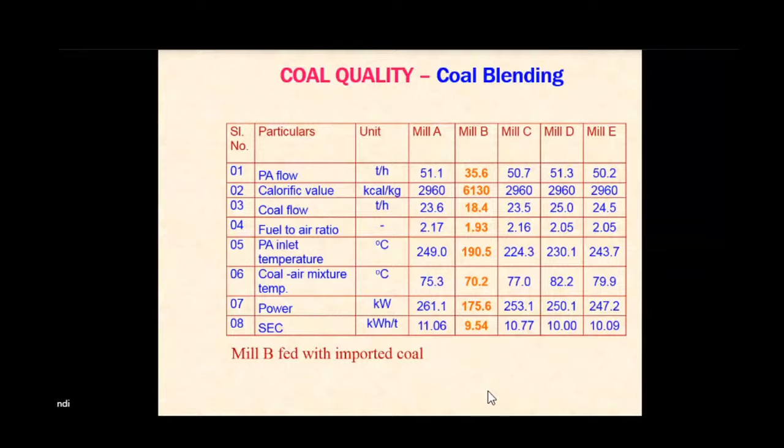As far as the environment is concerned, these EVs are better than internal combustion engines.

Even so, nowadays India is going for solar PV generation in power plants. Our honorable Prime Minister recently mentioned that in another 2 years we are going for 175 gigawatt solar PV power plants, and near the Kutch border around 30,000 megawatt solar PV power plant has been sanctioned now.

Almost 30 gigawatt at a single point, over an area of around 800 square kilometers, they are going to set up a solar PV power plant. That's how we are moving forward with solar PV power plants.

During night time we have other sources we go for. That's what I've shown in my planning report, that by 2026-27 our solar generation capacity crosses a certain threshold, as far as that question is concerned.